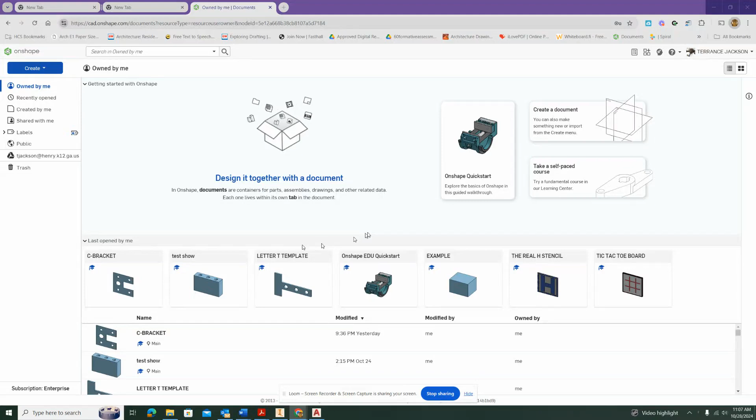In this exercise, we're going to be creating the C bracket using Onshape. The C bracket is a 9x9 plate that has 5 holes in it. The smaller holes being 1 inch and the larger hole being 1.5.

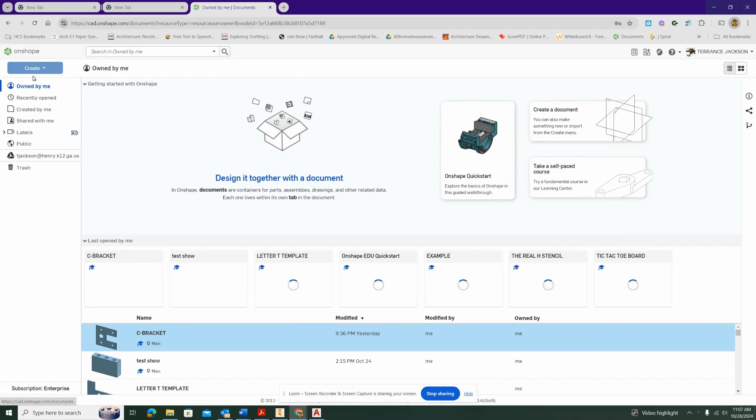So we're going to start the C bracket out with a new file. I'm going to go back to the base, go back to create, and do document. I already have one named C bracket, so I'll put a 1 behind this one. But for your purposes, you will just call it what it is, which is C bracket.

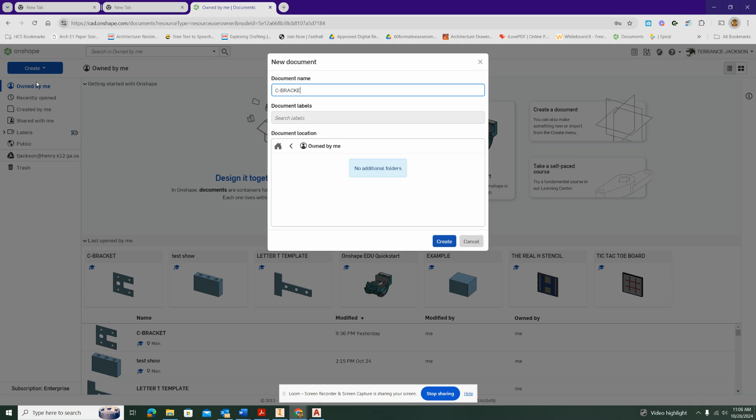All right, I'm going to do create. So when we start out, we're going to start out on the front plane. The thickness of this object is only like 0.25, and we can really do that with a notation rather than showing more than one view.

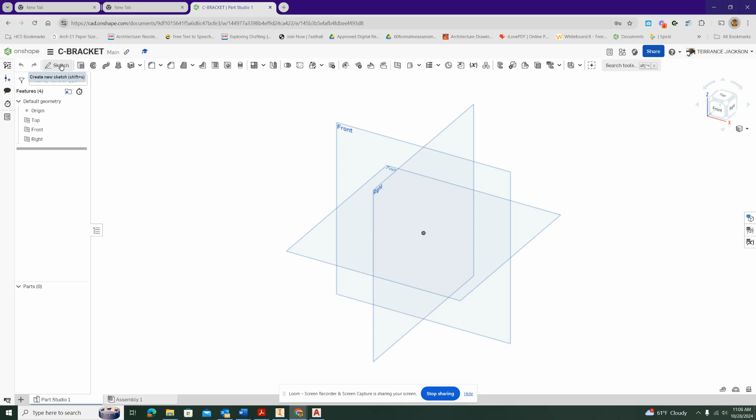All right, so we're going to start out with a sketch. We're going to pick our front plane here, and then we're going to turn it toward us. So I'm going to start out with a rectangle.

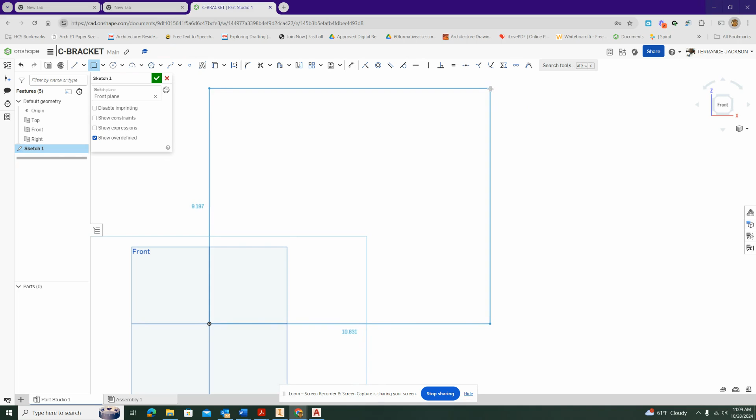I'm just going to pan this over by holding down the wheel of the mouse, and I'm going to use rectangle to create a rectangle that is going to be 9x9. I'm going to try to get close to the numbers as I can, but you don't have to be exactly on them because we're going to use dimensions in order to shape it up.

So I'm going to use dimension for the bottom line, and it's 10.831. I'm going to make it 9, and I'm going to use one for the right side. Right now it's 8 because it resized itself. I'm going to make that one 9 as well.

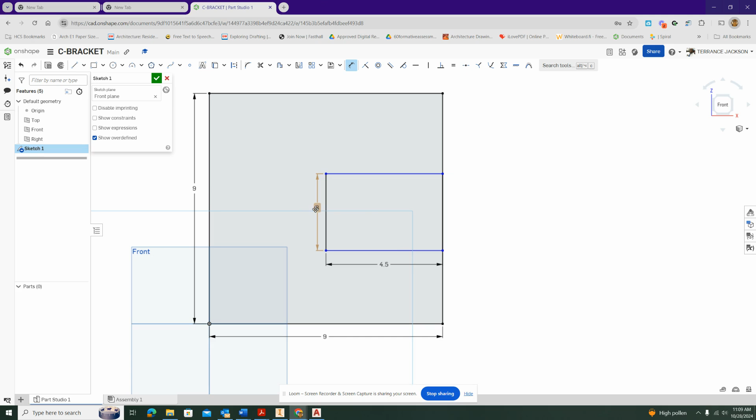Next I'm going to go ahead and put another rectangle here. I'm going to shape that one up as well. This line is going to be 4.50. This line is going to be 3. And the distance between this edge and this edge is also going to be 3. That's going to adjust it.

So when we finish sketch and extrude, we'll actually extrude around this section. We could spend time trimming that out, and if you want to do that, you can. It does the same thing.

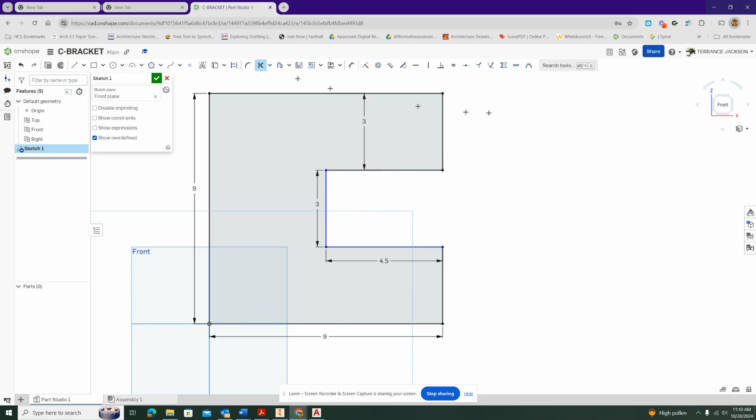All right, so we'll finish the sketch. I'm going to put it in an isometric view, and I'm going to go ahead and extrude it, setting my distance to 0.25. And hit the check mark. All right, so that's going to give me my initial base.

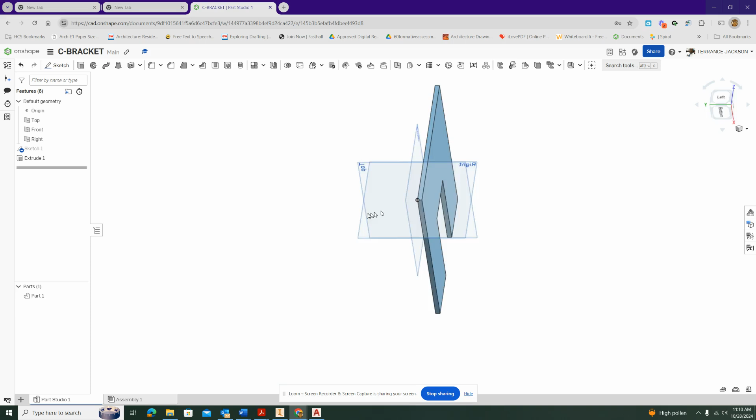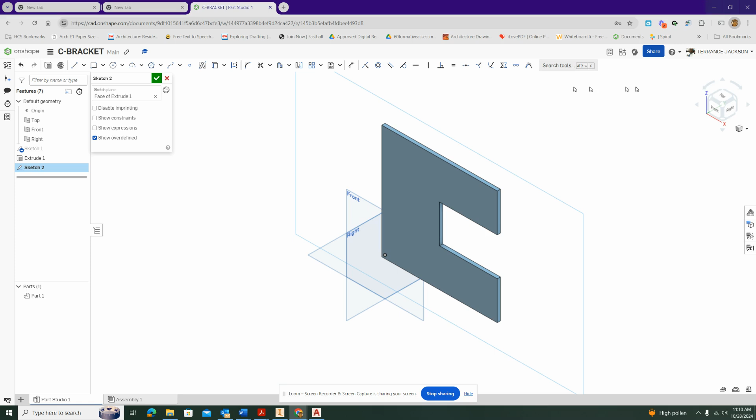And I'm going to go ahead and put it back in isometric. I'm going to start a new sketch, this time choosing the front view. All right, let's face it toward the front.

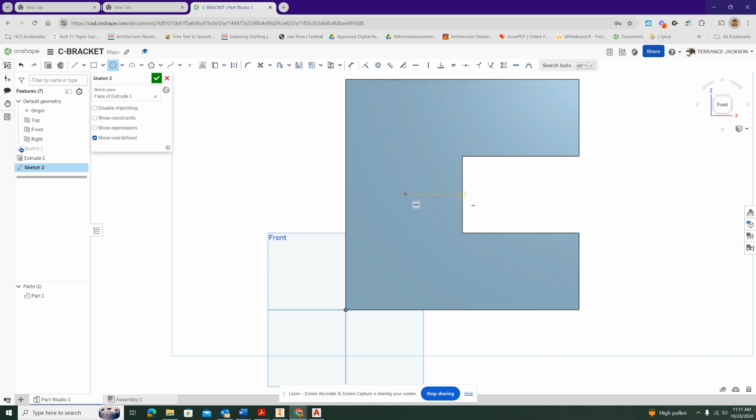And I'm going to use circle. So I'm going to start out with just a regular center point circle. I very seldom use the 3-point or the ellipse for anything, but the center point is probably the most common one you'll use. I'm just going to lock into this corner, to this midpoint right here, and then drag my mouse across. I'm not going to click on it, just lock into that point so I can get this yellow line to make a horizontal constraint. Then I'm going to come somewhere toward the middle and pick, and make my circle.

So in this case, we're going to use dimensions, and we're going to make this 1.50. Yeah, let's make it 2. I think that's closer to the number.

All right, so then I'm just going to continue using circle, and I'm going to line up with this point. I'm not going to click on it, just line up with it, touching it when it turns yellow. Then I'm going to drag my mouse straight, and it's going to give it a vertical constraint. I'm going to do the same thing with the one at the bottom.

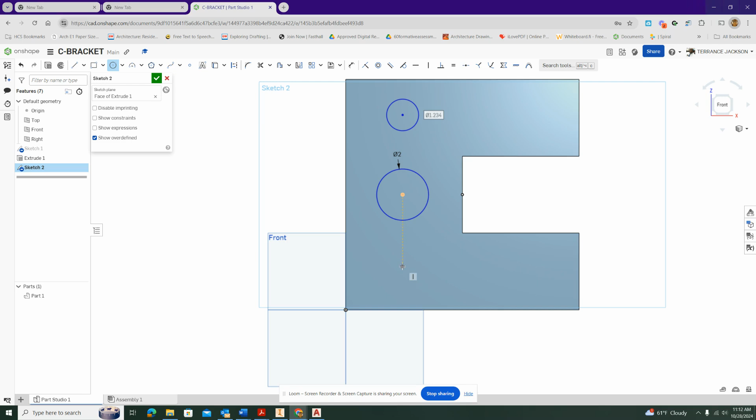Now, I haven't put a size in for the circles just yet, but that's my next step. So I'm going to go ahead and make these 1. And to keep from doing so much at one time, I'm going to go ahead and do some dimensions.

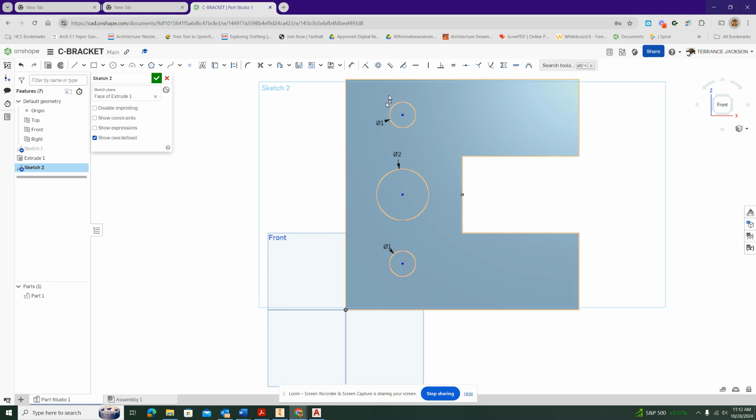And I'm going to make that 1.50. I'm going to do the same thing at the bottom. And I'm going to put one between here and here. That one's already 4.50 because I locked into this point right here, so we can just either hit escape or hit OK.

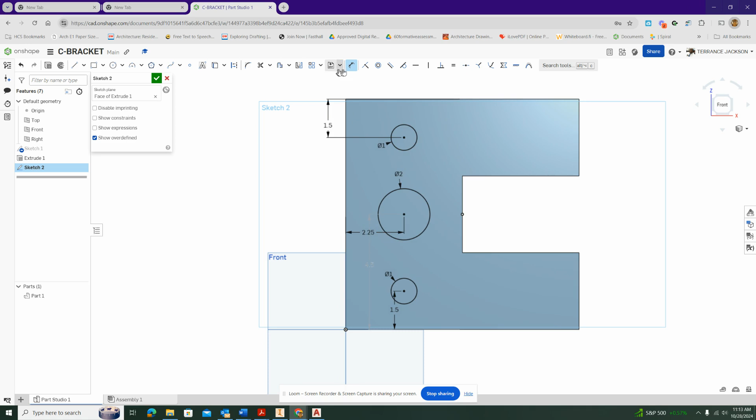And now we're just going to align it vertically, and we'll do 2.25, and that's going to center it. All right, so I'm going to go ahead and hit the check mark and finish that sketch. Then I'll do the last 2 holes on a different one.

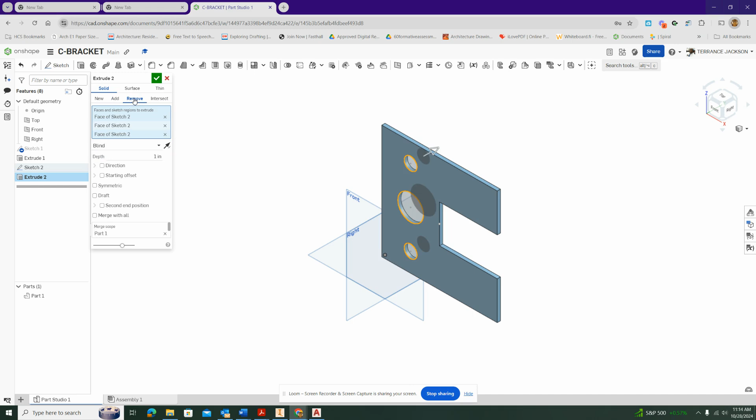So I'm going to do extrude again. I'm going to pick the 3 circles, and this time I'm going to put it on remove. It's going to reverse it, and I'm going to hit OK.

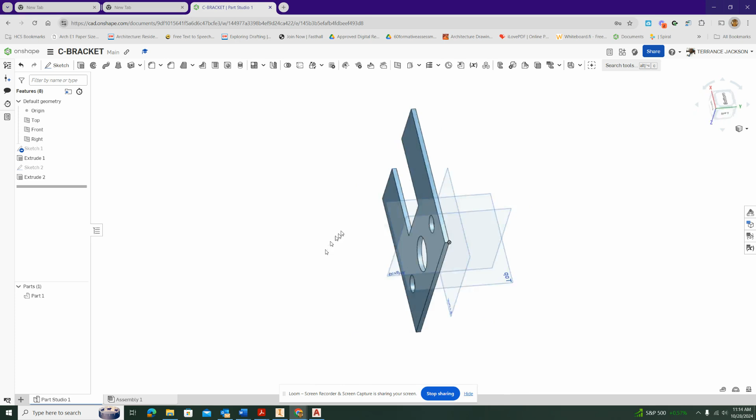All right, so that gives us an initial C bracket with 3 of the holes in it. So we just got to put the last 2. All right, so we're going to do another sketch, but this time we'll do it on the same plane as before. So I'm going to do a sketch.

I'm going to pick this surface and rotate it toward me so I can look straight at it. If you're comfortable doing it in isometric, that's fine, but it's a little bit more tedious to do it that way. So then again, circle.

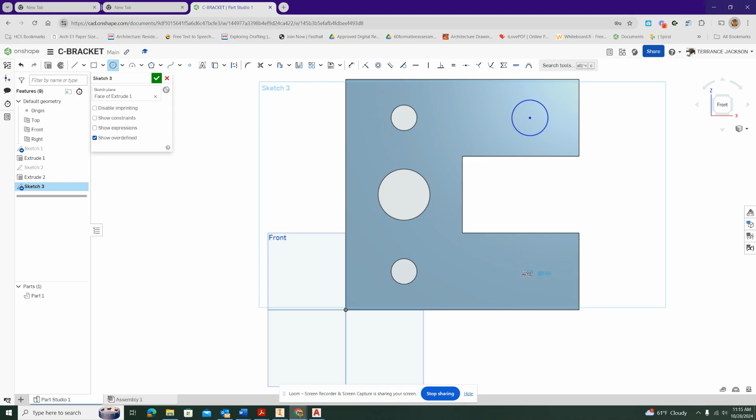I'm going to lock into the center of this one, if it'll let me. And if it doesn't, that's okay. And I'm going to lock these 2 in together, and both of them also be 1. Looks like it adjusted both of them, or pretty close.

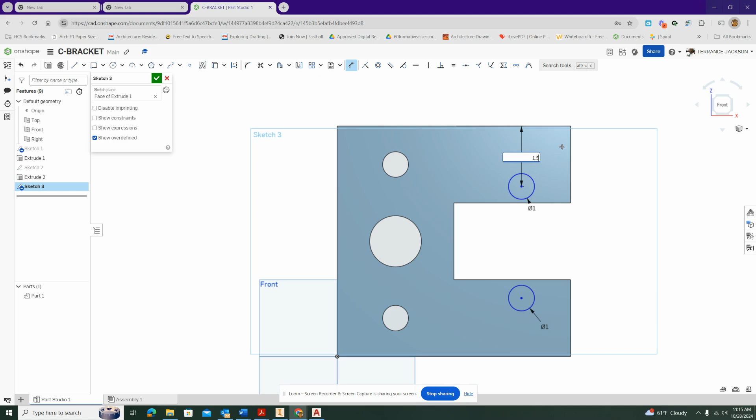All right, so I'm just going to put it in the middle, if it'll let me. There we go. So it should be 1.50 for that one, 1.50 for that one, and we'll adjust both of them from left to right at the same time.

There we go, and we're going to go 2.25 inches. So because they were aligned together, they should actually move together. But if you want to check it, just in case.

Dimensions get a little tricky. I think because it's locked in, it won't let me do the dimension, so that means it's already set. So it's giving me this error right here. All right, so we're just going to leave that as is.

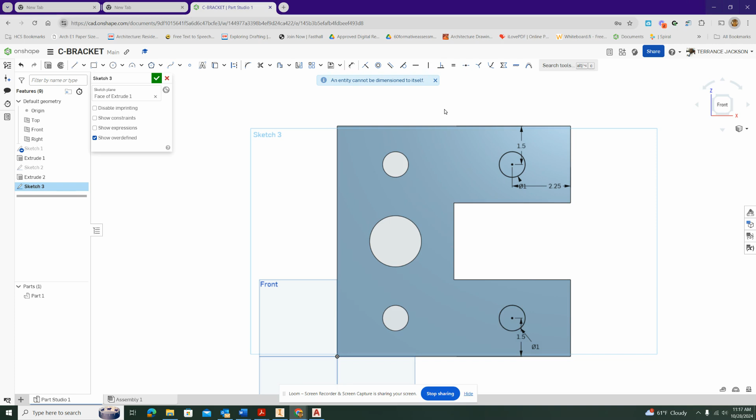All right, so we're going to finish the sketch, and I'm going to put it in isometric.

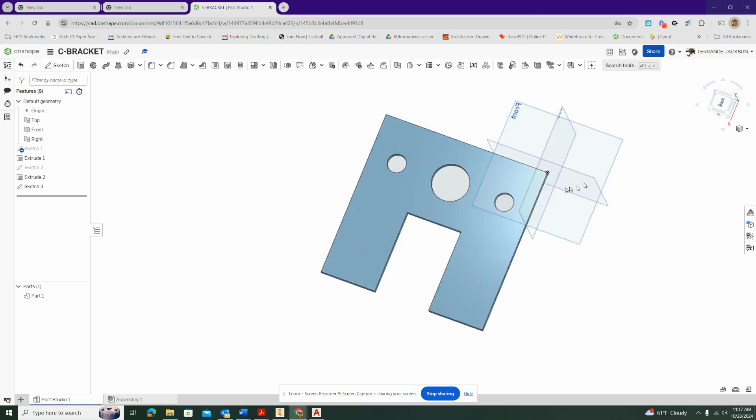I can use my cube for that as well. You can also grab the whole cube in some cases and spin it around, but I mostly just use my right mouse button to do that, and it works much faster anyway. Then I'll just go back to isometric.

All right, so we're going to extrude. I'm going to pick those two, and we're going to put it on remove. And we hit OK. So the C bracket is technically done.

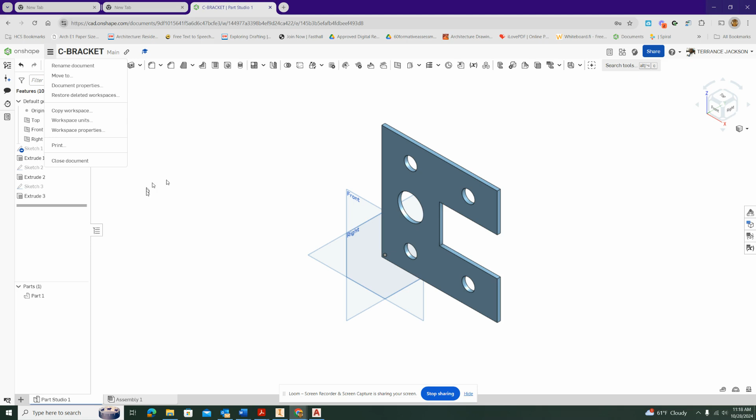So there's no save button in Onshape. It automatically saves every few minutes. So if you hit the drop down, you'll notice that there's no save button. So the good thing about this program is that it does save your work as you go along.

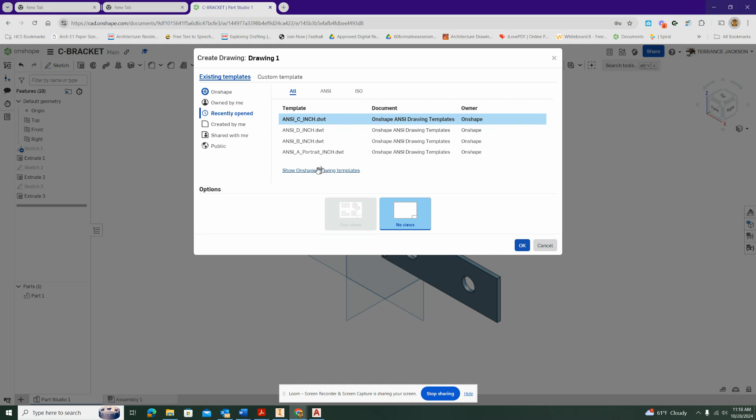But what we are going to do is go ahead and create a drawing for it. So we just go to the plus here, create drawing, and we're going to use a C-size sheet because it is 9x9, so it's a fairly large part.

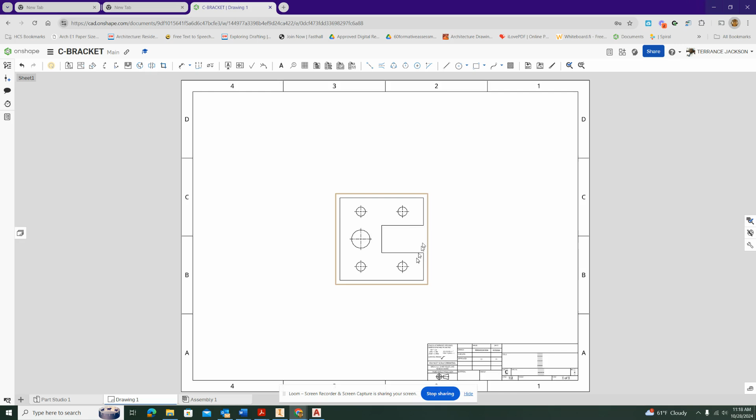All right, so we're just going to grab the part and bring it over, and I'm going to center it on the view. All right, and by default, it gives us the center lines already, which is a lovely thing.

And then I'm going to project off of this one. I'm going to get my isometric over here in the corner. So I'm going to click once, and then it's going to place it.

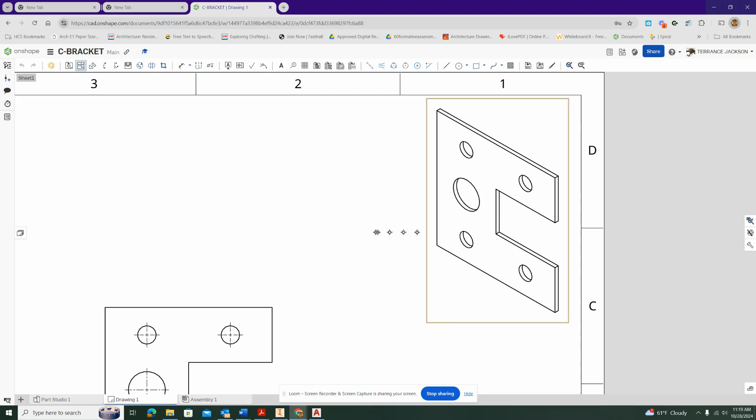So all we got left here are really just dimensions and the title block information. So we're going to do dimension. We'll bring this one out. That's right there, and we'll go from this one to this one.

Line it up, and then from this one to this one, and line it up as well. Then we just need an overall for the height, which would be 9.

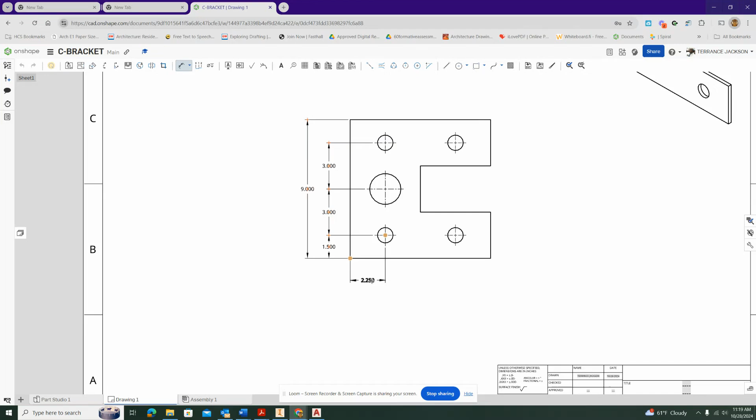And we'll do pretty much the same going this way. All right, so since we already have those other two lined up over there for the holes going through, we don't necessarily need those two. We just need these two right here.

And then last but not least is putting in dimension, so we'll double click on that, and we're going to put 4 holes, all caps.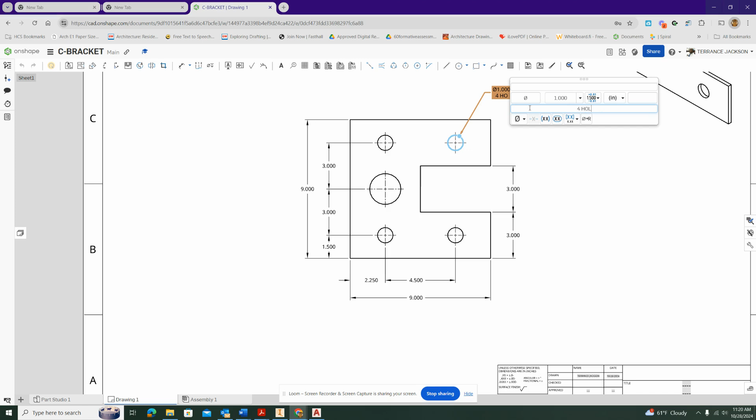And because we did 4 holes, we don't need to do every single one of those that are exactly the same. So we're going to do dimension for this one also. So we're just going to kind of move it up at an angle so it doesn't touch anything else.

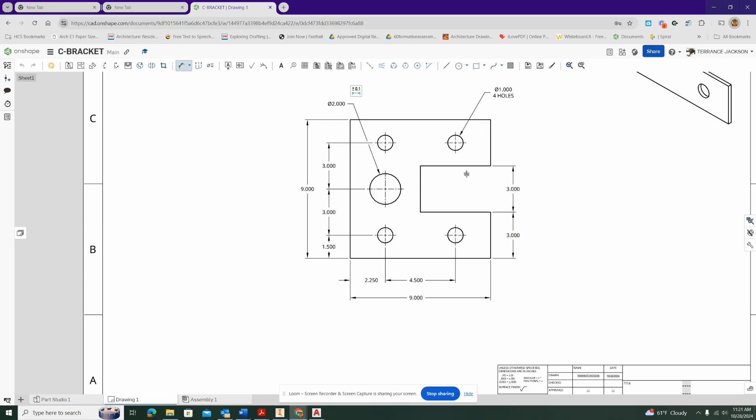And that is pretty much it for the design itself. We just got to do the title block information.

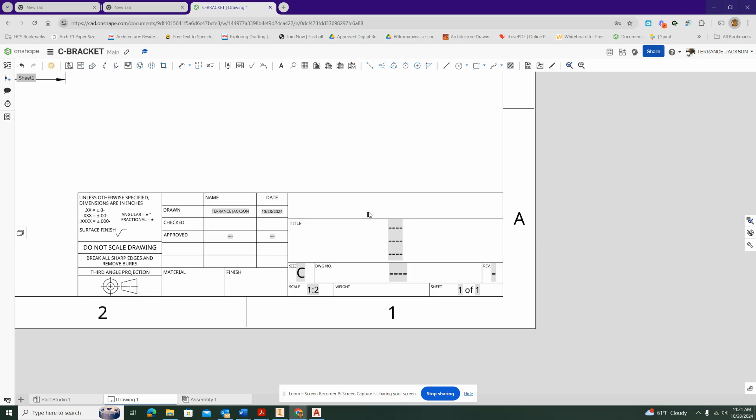And let's see, we got to find that text tool that actually works without doing that. Oh, you know what, we're not going to do that. Here's a shortcut, because that one is a little bit annoying to work with.

So we're just going to take this parameter right here and move it up, and we're going to take this bottom parameter and delete it. Let me do that. Undo.

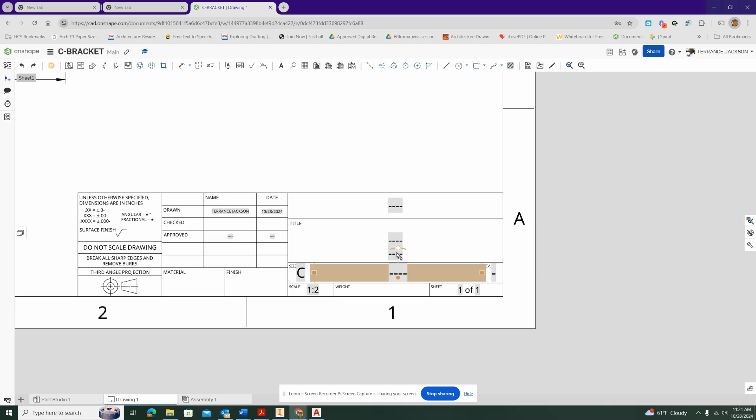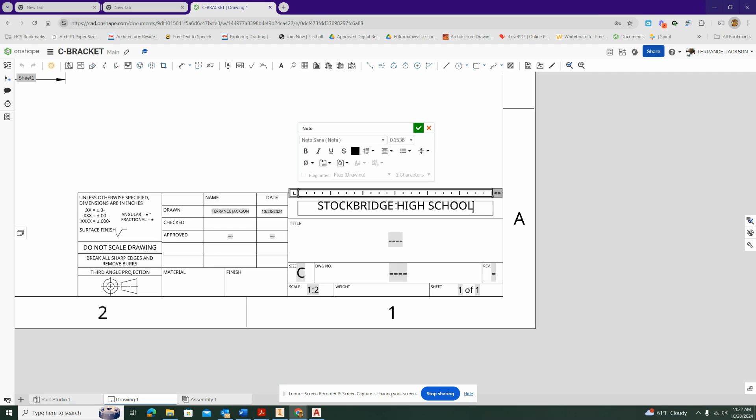All right, so if we double click on this one, we can go ahead and just change it. Double click here, and we're going to C-bracket.

All right, the scale is already set 1 to 2, which means that it's at a half scale. There's no drawing number. It picks up today's date, and it should pick up your name, but if it doesn't, you can always double click and change it. So if it's putting your student ID number there instead of your name, then just double click and change it to your name.

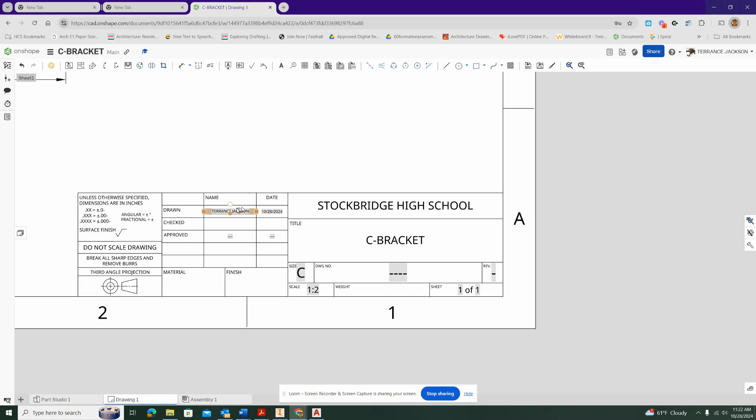All right, so as far as the drawing as it is with the isometric and so forth, it is actually done.

So this is actually trying to give it a little color, so it's doing a hatch. Let's see, can we find something that looks okay? It doesn't have a whole lot in here. So I'm going to make it steel.

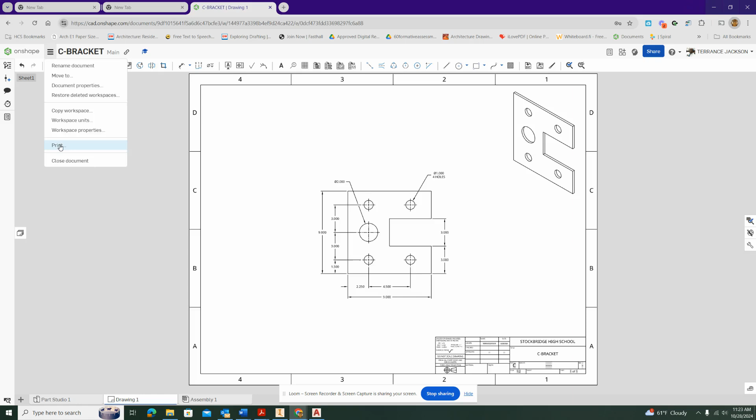Yeah, we're just going to leave that alone. All right, so I'm going to go to here.

We're going to go to print, and even though it says print, it's not really going to print it. It's just going to convert it into a PDF, so we're going to convert that into a PDF. And once it converts it into a PDF, you're just simply going to do the download, and you're going to save it.

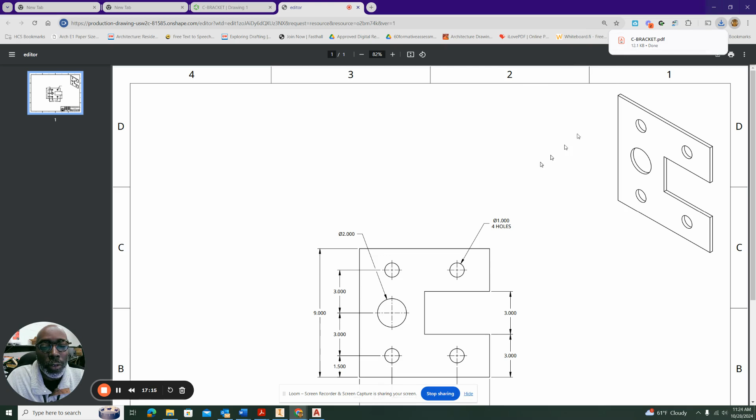Hit save, and as you see, it'll bounce up as a download, and then that's the file that you'll actually turn in. And that's pretty much it.